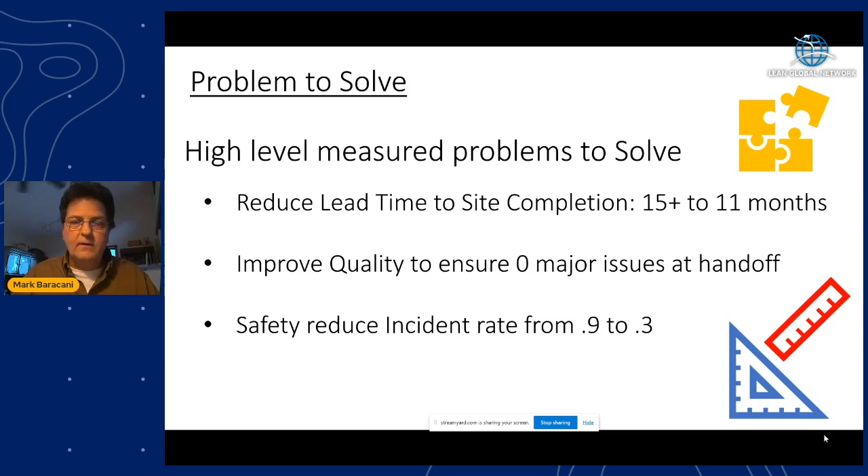And Microsoft is extremely into providing a safe construction site, more than any other company I've ever worked for in my 30-some year career. So the safety goal was to reduce the current incident rate that was at about 0.9 to 0.3 and be able to sustain it around 0.3 or 0.2. Now, if some of you are in the construction field, I think that the global averages are more between 2 and 3 on a recordable incident rate. So Microsoft really wants to be much better than that. We want to be 10% of that. So they have extremely high safety goals at Microsoft, which is a great thing to keep the construction workers and their employees safe.

So it's definitely more of a challenge to get to the value creating work than it was at Genie, where you're working directly for that company. So that was one of my biggest concerns when we started this venture. It has some challenges, but it has not been as much as I thought it would be.

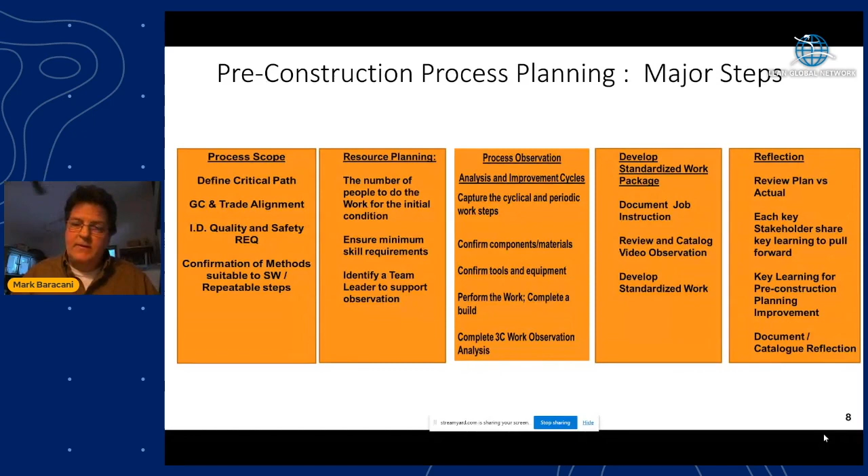And that was really the process that we developed with the HAC.

Studying the current work starts with the 3C training, right? And I'm sure most of you are familiar with this. So some of the initial observations that we made, in the initial pre-planning stages, we worked with the manufacturer. We said, hey, you guys designed this thing, you must have an intent on how it goes together. So that was the starting process. We got basically an IKEA instruction set from them. That was a great standard work starting process based on their intent.

And then we worked with the trade partners and really focused on number 3 down in the bottom right corner here. We taught them to visualize waste, value added, and incidental work. But mainly we focused on making the work more cyclical. The construction trades don't believe a lot of their work is cyclical - it's a special build, it's one of a kind - but it's made up of many cyclical, repetitive processes. So that's one of the key learnings: when you really start focusing and making their work cyclical, assigning tasks, that's really where a lot of the benefits come into play.

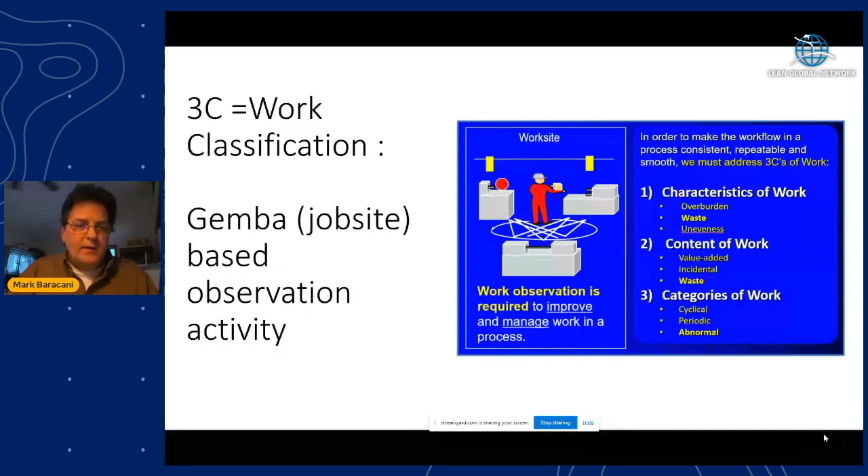So we gave them some brief training on this, showed them how to identify waste, and then attacked the Gemba, the actual work on the construction site.

And we deeply understood the current state. We dove into it, right? Looking at the material flow and the other flows associated with the 5 M's. So many of you have heard 4 M's - I threw in another one, because with construction, when we say it's 5 M's, we've got Mother Nature to deal with, because a lot of this activity is outside. So we got to deal with the snow or the wind, we have to take that into consideration too. But in this deep dive, we focused on the trade members - how many do we need?

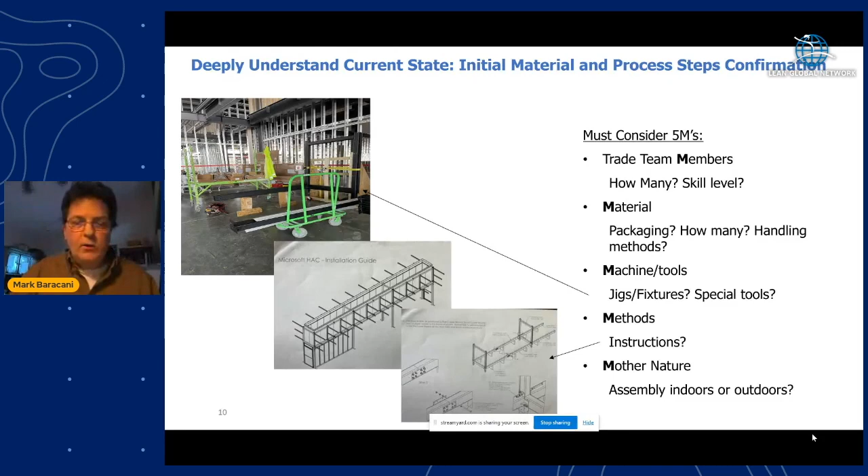I'm just going to do a time check here to make sure I'm not talking too long. I think I'm on track.

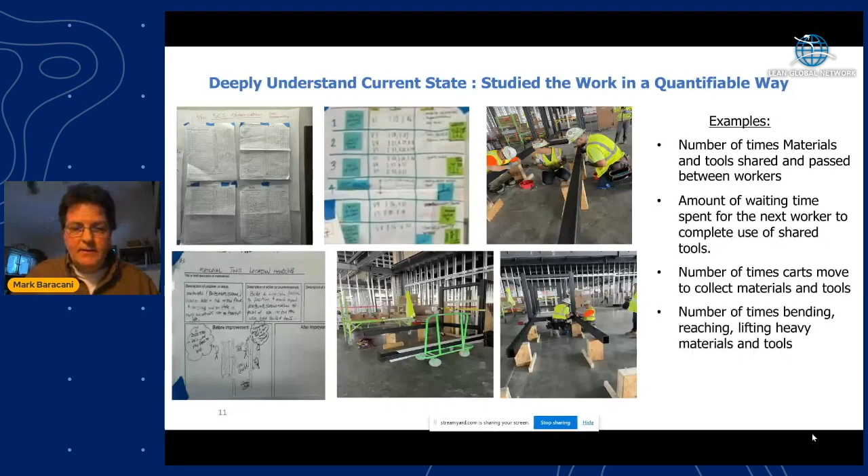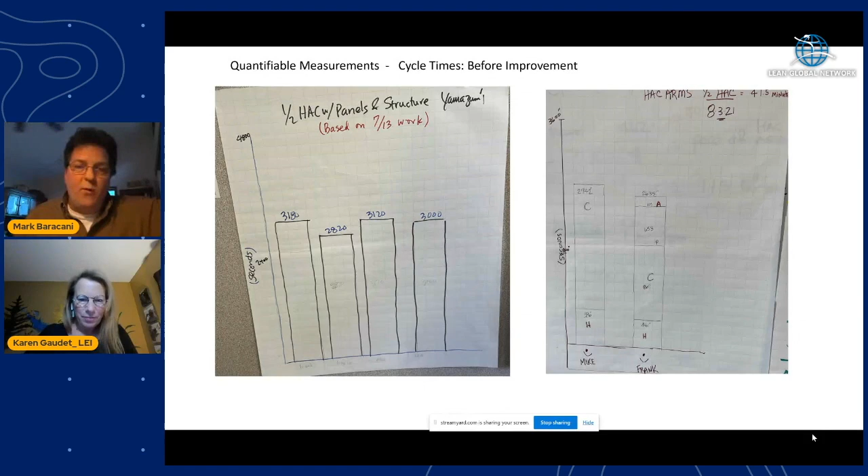So the next thing you see on the screen right now is the Yamazumi. It was basically the measured cycle times before the improvement. So this is the times it took, 3,000 seconds to assemble a half HAC, basically.

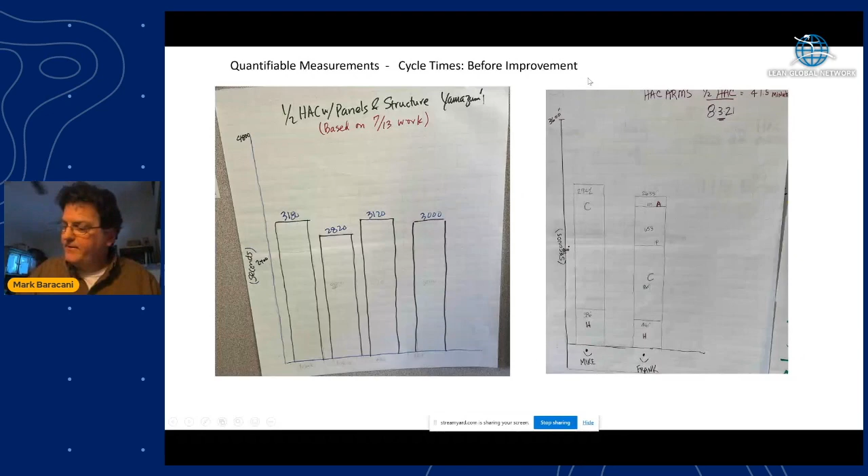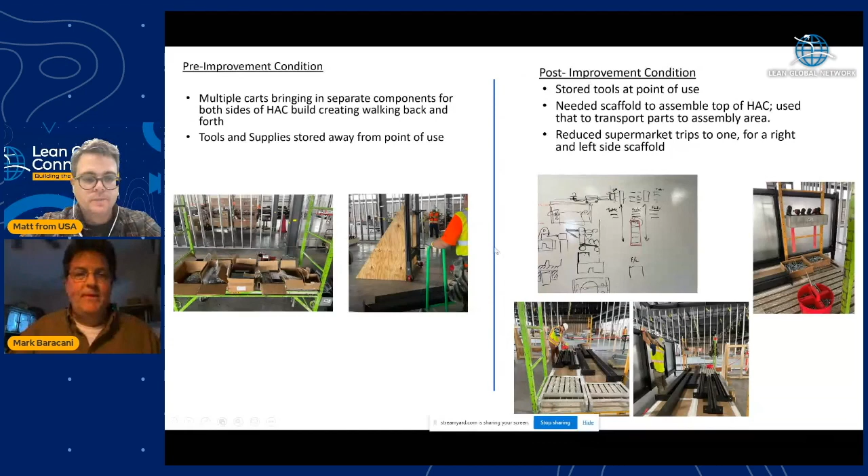Okay, so I got some examples of the before and after, basically, of the improvements. To give you an idea of some of the things we did: they had multiple carts bringing in the components, they had tools and supplies that were stored away from the point of use, and they were constantly walking for parts, constantly walking for tools, and still sharing. On the right side, you can see the improved condition. We moved the tools to the point of use, and that's what you see up here on the right, far right picture.

We needed scaffolding to assemble the top portion of the HAC, so we decided to use that scaffolding to transport the parts to the assembly area. We got rid of those drywall carts and reduced the supermarket trips to basically one trip for the right and left side of the scaffold, greatly reducing the number of trips.

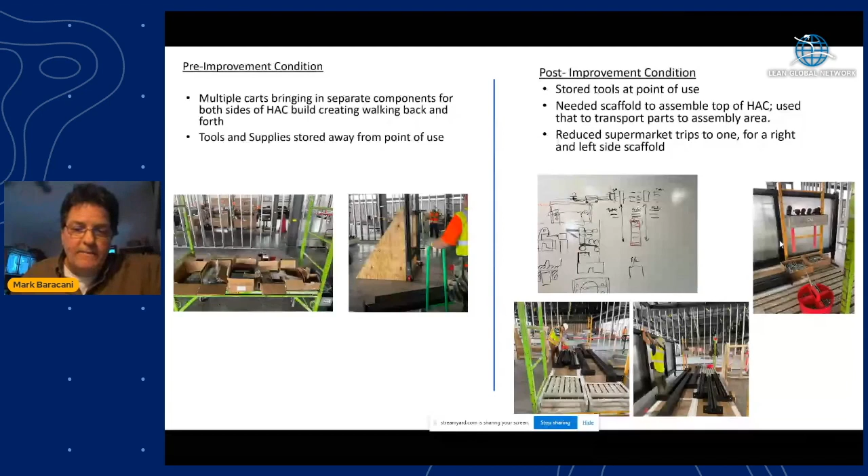The scaffold would come out of the assembly area, they'd fill it with parts, and then remove those parts from one side of the scaffold to build up the lower section of the HAC. That freed up space for them to stand there, and then they would reach and grab the other parts to build up the upper part of the HAC.

The before condition was they were delivered to the HAC one at a time. They leaned them up against the HAC, then ran a string line across the top, and used 2 people, as you can see there in the middle, to basically mount the arms.

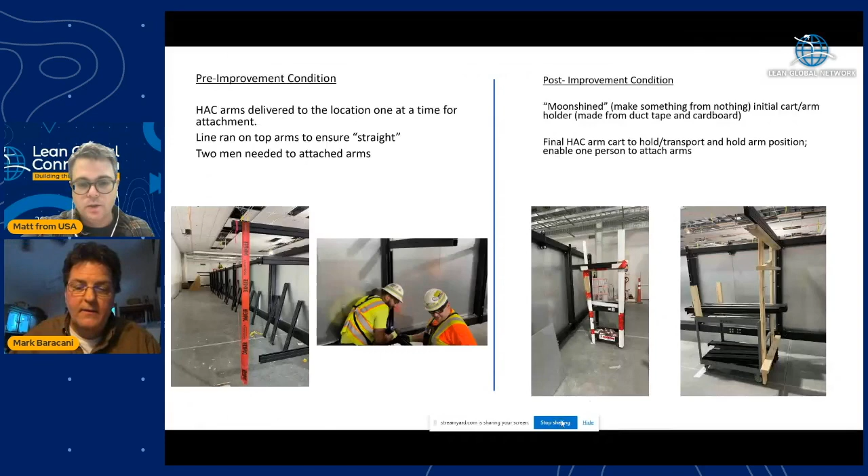I'm sorry to interrupt your presentation. I think we've identified the source of that audio. You may have another tab open in your browser that is causing the problem. If you could close the other tab, we should not hear them anymore.

We no longer hear additional voices, so let's get back to your presentation. I apologize for that. Thank you. Okay, let's see if we can... Sorry about that, I didn't realize. Okay, Karen, so we have this. Okay, great, Mark, you have your slides ready. Here you are, thank you.

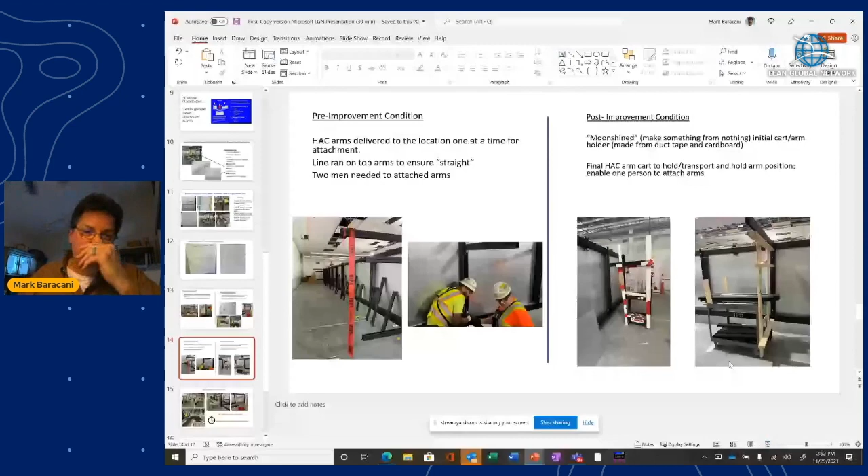Okay, so this arm, if you look at the after, the team, the LEI, led this kind of moonshining effort. If you're not familiar with the moonshining term, it's making something from nothing, based on the old moonshiners down in the south of the U.S. who made moonshine from old radiators and stuff they found in junkyards.

So the LEI team and Microsoft team made up an initial cart, basically out of duct tape and cardboard, to give the operators some ideas on a different approach to transport and insert the arms.

So the cardboard one was transformed. The mechanical team, made up of carpenters, made about 4 of these out of wood. They were able to load the carts up, go down the line, and install the 3 levels of arms on this HAC on each side, and it became a one-person job at that point.

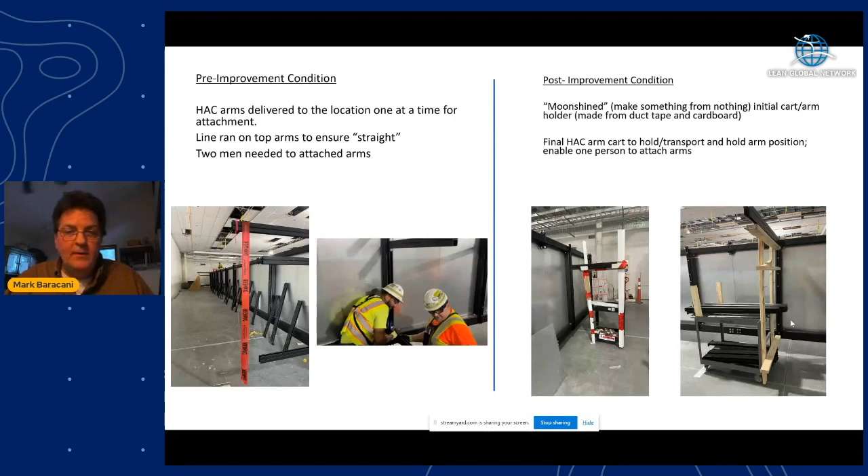As a result of these work improvements, we reduced a lot of hard work, a lot of safety risks, and a lot of waste, and we saved 28 minutes of time on half of a HAC section, which is a little over 50% of the initial time that we observed.

And this, you've got to take into account also, we hit the ground running. Remember, we did that 3P process. We planned, we had a lot of tools ordered, we had things there. So we cut the cycle time down by more than a half. I think it would have been a much greater improvement had they hit the ground with no support in that pre-construction process planning. And each building roughly takes 100 of these HACs.

So you can kind of get an idea of the actual time savings. If you can save 28 minutes on half a section, and you've got to build 100 of them, with a team of 4 people working on it, it's a good savings for everybody. Everybody benefits from it. This mechanical team comes off the critical path.

They get their work done on schedule. The general contractor's happy, they're happy. Microsoft's happy, we get our data center on time. So it's definitely a win-win situation.